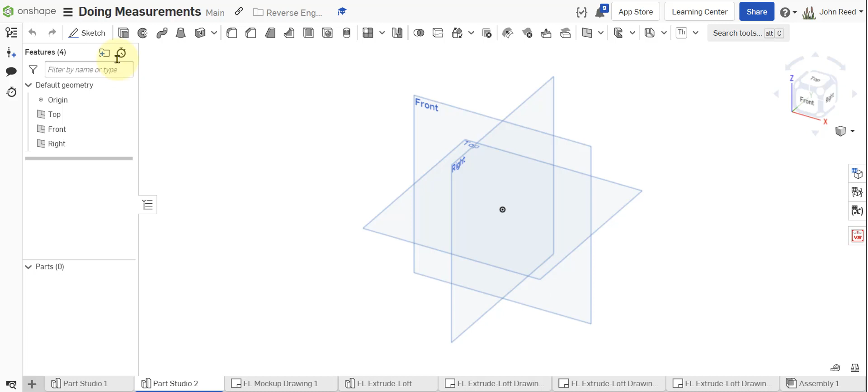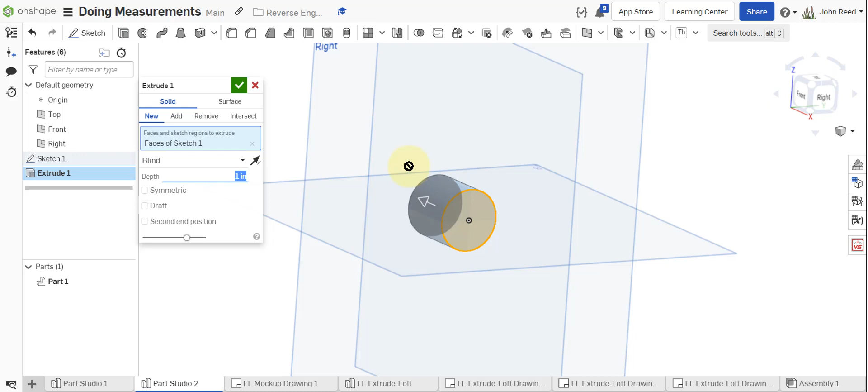I'm going to put a sketch on the right plane, press N, and use Extrude to make the front end of the flashlight. These numbers are just my numbers and may not match exactly yours, but I'll go with it like this and work my way up. So there's the first part of my flashlight, the tip of the larger end.

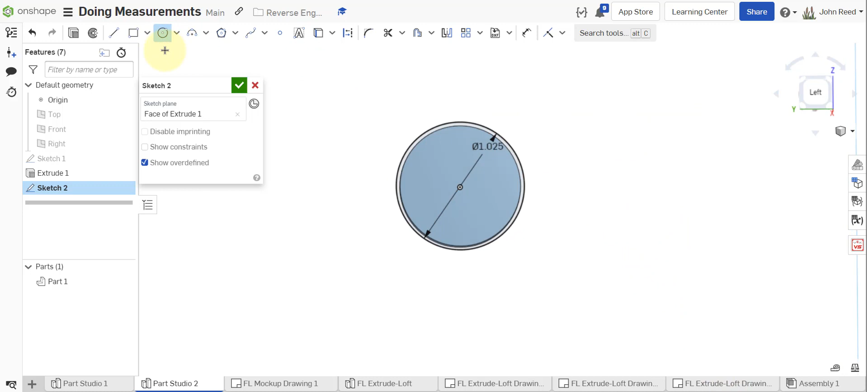I'm going to turn the origin planes off and place a sketch on the back here. Press N and do another circle, a little bigger. So we have it there, like so, and we're going to finish that sketch and extrude both that part and that part out, a distance. I think I got them both.

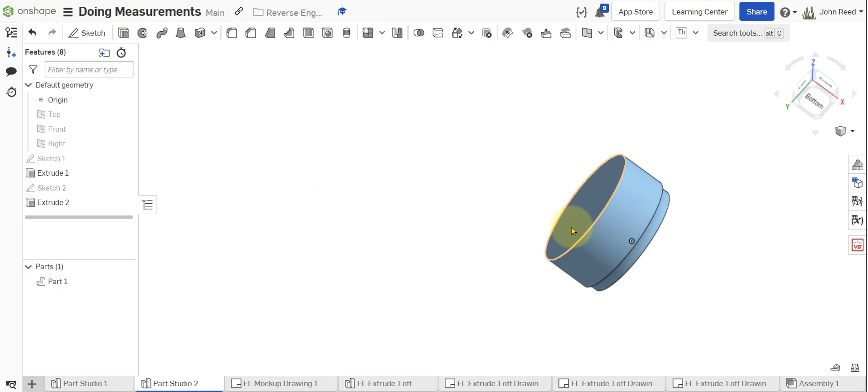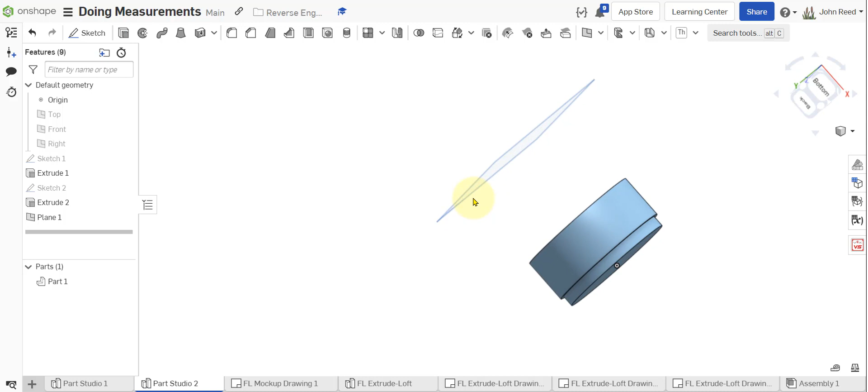So now we've got this, and now I want to do the curved part. I'm going to right click on the back here and say offset plane, and have an offset plane that in my units is a distance away from that face. Let me accept that. That seems too much. Let's go back in here. Yeah, that's too much, so I need to subtract a little more off that, minus this much. I believe that's what I want. Right there, so I've got this sketch there.

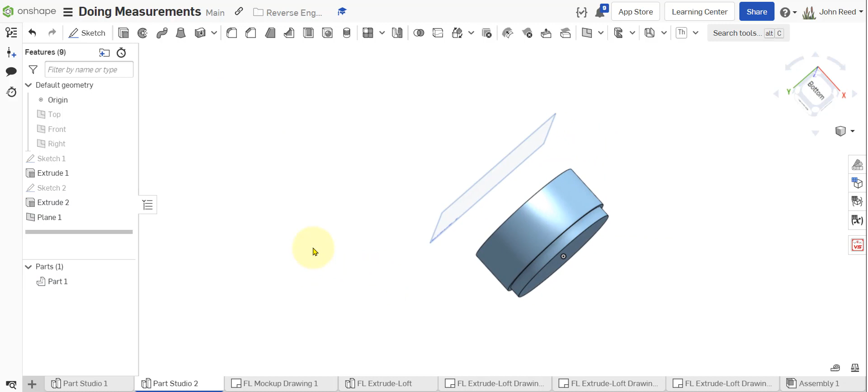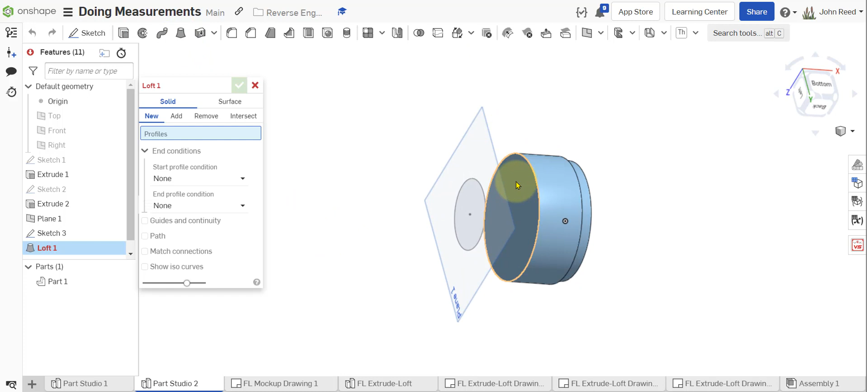I'm going to place a sketch on it, that plane, plane 1, and again put a circle right in the middle and give that a diameter. That's sort of the body of the thing where you hold it. Now I'm going to do the loft, going from this to this, and you can see it makes like a cone. To make it look like the flashlight, I need to play with how this profile interacts with the original two-dimensional shapes that make up the loft.

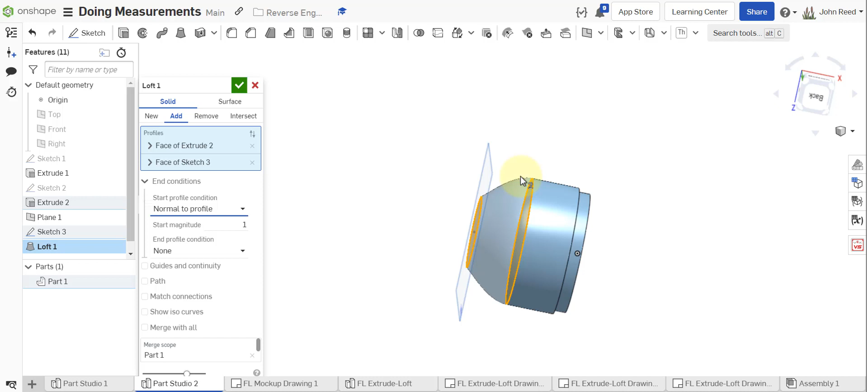For this one, start condition, I think I want that to be normal to the profile. The profile is the circle here, so right here it makes it perpendicular to, or normal to, the circle. And for this one, I could say none, I guess, or have it be parallel, so tangent. That changed it a little bit, so it comes in here and it's tangent to the circle at that point. I'm going to try that one.

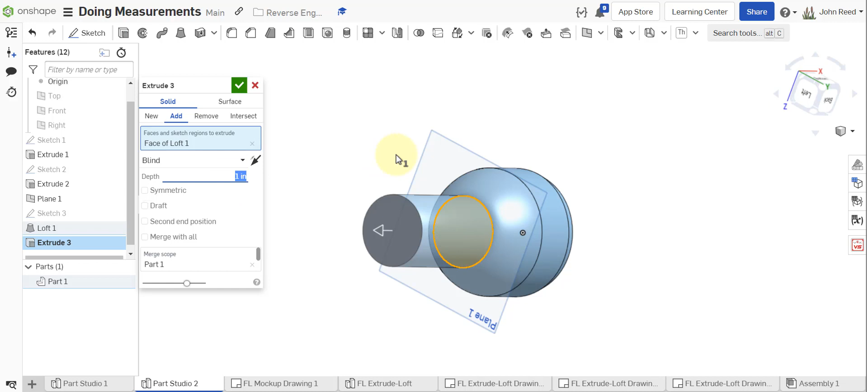So there it is. And then finally I can extrude out this part a distance to make it kind of look like the flashlight. So there we are, let me turn the planes off. We've got something that looks like this in sort of our mock-up of the flashlight.

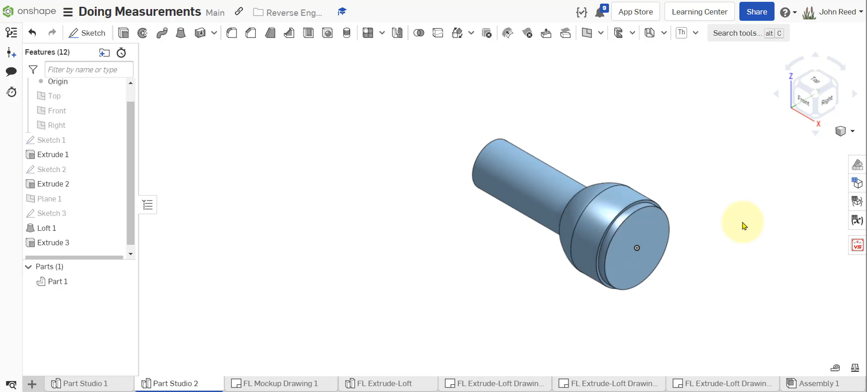Now I'm going to put it in isometric mode. To make the switch, there's a couple of ways we can do that. We can turn the origin planes back on, and we're going to try it again. So offset plane, it's going to be up that way, 0.15 plus the radius of that cylinder. I think that's right, so I'm going to accept that. Pretty messy. I'm going to turn all the planes off except for the one I just made, and you can see it's sitting there up above the flashlight.

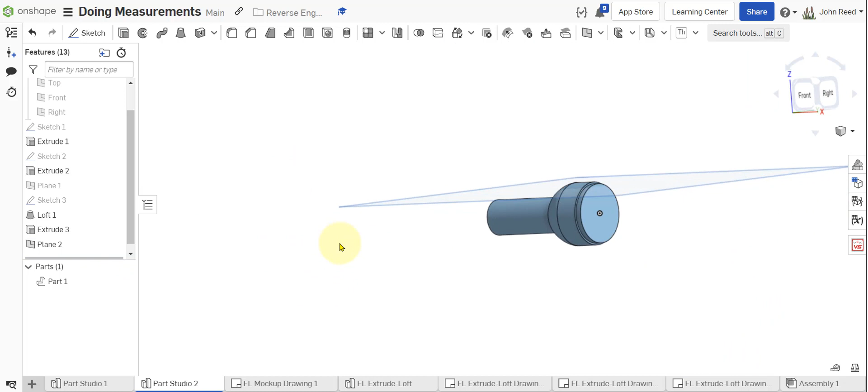So I'm going to place a sketch on it, press N, and I'm going to use this geometry here because what I want to do, let's see, what do I want to do? I want to center it here, and then I'm going to extrude down into and meet the cylinder there. I think I can come here and let's see.

If I do a center point rectangle and come along here, it'll tell me where the center is, and I think I can make it right there. Various things you could put in here. Your numbers may differ a little bit from mine.

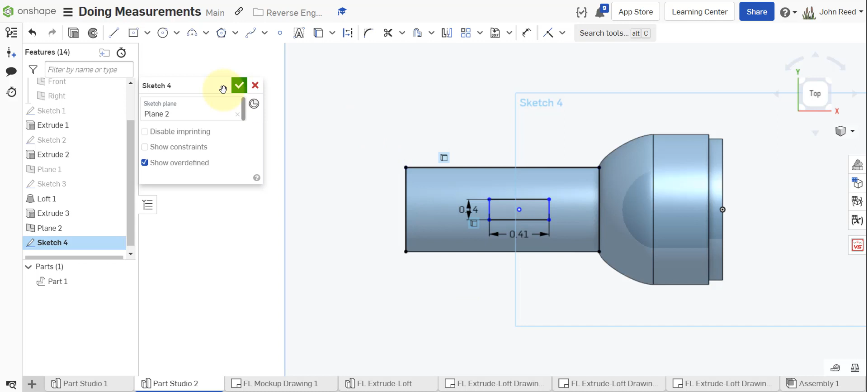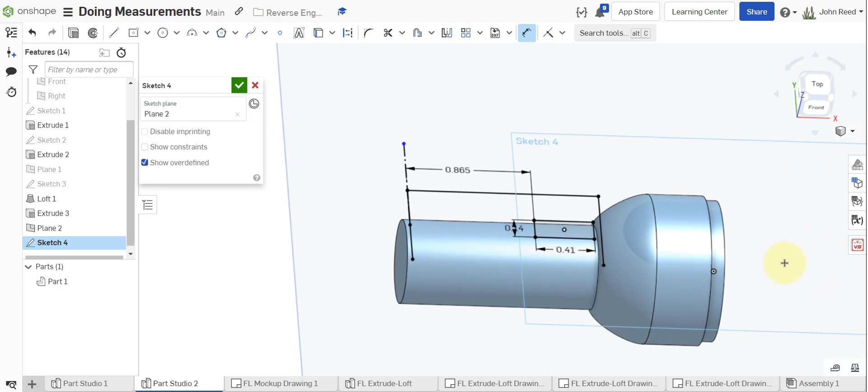So now let's extrude this guy back the other way, and in terms of the extent, just up to next. And there it is, and there's our sort of mock-up, so to speak. A lot of details missing, but we have the general flashlight right there.

Okay, so we'll put that in isometric orientation, and I think that has it. So that's the Extrude plus Loft. Thanks for watching.